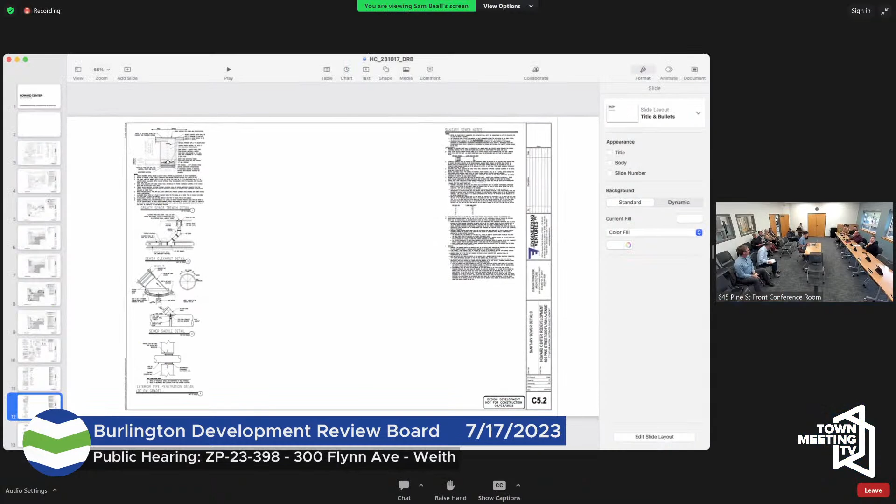So we have all of the drawings here. I'm going to share them by Zoom. Let's see if I can.

You saw everybody was here today to support the project we presented at sketch plan about a couple months ago. I don't know that, I believe Leo, you were here, but not Evan. Were you here? You were here. Okay, I did watch the original presentation.

Okay good, I just want to make sure I understand what you know and don't know, because we're going to focus on some of the staff report comments as well as some of the things we've heard at sketch plan and how we address them.

Before we get into that, I want to give Sandy a few moments just to introduce the project and talk to Kevin. We'll talk about landscape. I will talk about the architecture, and then we'll turn it over to you guys for questions. Sounds good. Great, thanks, Sam.

Good evening, everyone. I'm Sandy McGuire, and I serve as Howard Center's Chief Financial and Operations Officer. I'm excited to be here tonight talking about our redevelopment project. It's been a long time in the works.

We began searching for a solution to our increasing facility needs more than 5 years ago. And the project before you, demolishing the existing 24,000 square foot building and constructing a new 50,000 square foot building, will enable us to do a number of things.

It will enable us to co-locate services, providing efficiencies for those that we serve, and to increase the care coordination across our multidisciplinary teams. It will provide a contemporary workspace that supports technology, productivity, and collaboration, while also supporting the more fluid and flexible workplaces of our staff today.

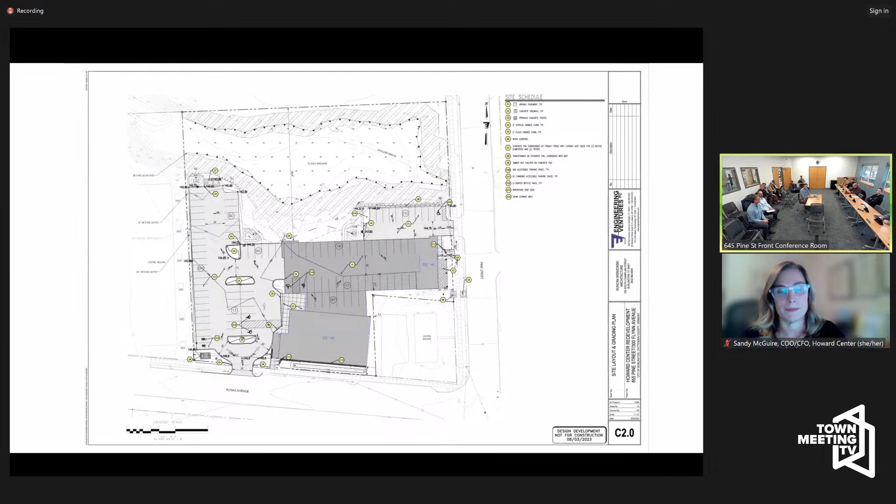Sure, briefly, it hasn't changed much since we met with you. It's schematic design, sketch design, and briefly, the parcel is on the corner of Flynn and Pine Street, right down the road here. The north half is the Englesby Ravine. It's well treed on the north and south side of the ravine. There's steep slopes down to the brook.

It's a wetland area with protective zones coming south towards the development. We met about a month or so ago with the Conservation Commission in this room and had a productive conversation, and Art Gilman, the wetland biologist who did the delineation, presented that it's almost park-like down in the ravine because of the overgrown canopy.

There's not a lot of invasives, there's not a lot of undergrowth, and it's just open. Probably the main thing to mention is preserving those trees and the shade of the ravine, and doing what we can to prevent invasives from spreading is the main goal there.

The south half of the site is the developed portion, and we're staying within areas that were pre-developed, whether building, paving, lawn, or accessory buildings. As you know from the summary, the building has grown by about 100%, double the size of the parking. That's achieved through efficiently laying out the site, putting parking under the building.

The main characteristic to mention is that while the existing site drains to the north into the wetland without any treatment, the entire site now will be collected, treated, and retained to the state and city standards before being released into the site.

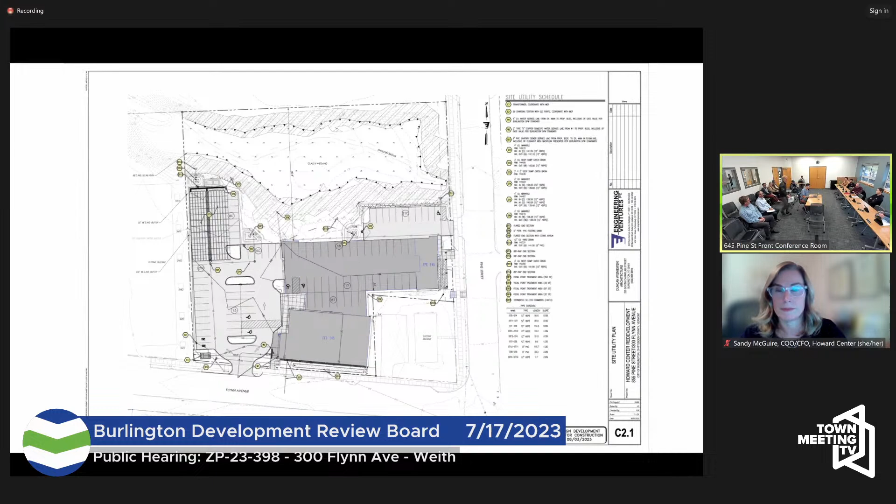At the Conservation Commission there was a discussion about native species on the site. We had a discussion about that, and I'll speak to that, and then we'll talk about the trees. As Kevin highlighted, the main entry to the site is coming in off Flynn Ave, and there's this building facade that parallels Flynn Ave.

There's a lot of ornamental plantings along there, and a rain garden for stormwater capture and treatment. So it's serving two purposes: one for the stormwater treatment, and also to address that frontage along Flynn Ave. There's a lot of landscape plant material along there that engages on the public side.

That's also the main entry - you come in off the sidewalk, the front door is right there coming in off Flynn Ave. That also coincides with the arrival sequence coming into the building, the signage, that sort of stuff. So that's really the primary focus of most of the landscaping.

There are shade trees in the parking lot where the islands are created to meet the shade requirements with large canopy shade plantings. As Kevin said, we're not really doing much on that northern portion of the site, just retaining as many trees as possible. Moving east on Pine Street, there's a secondary entrance and engagement along that streetscape.

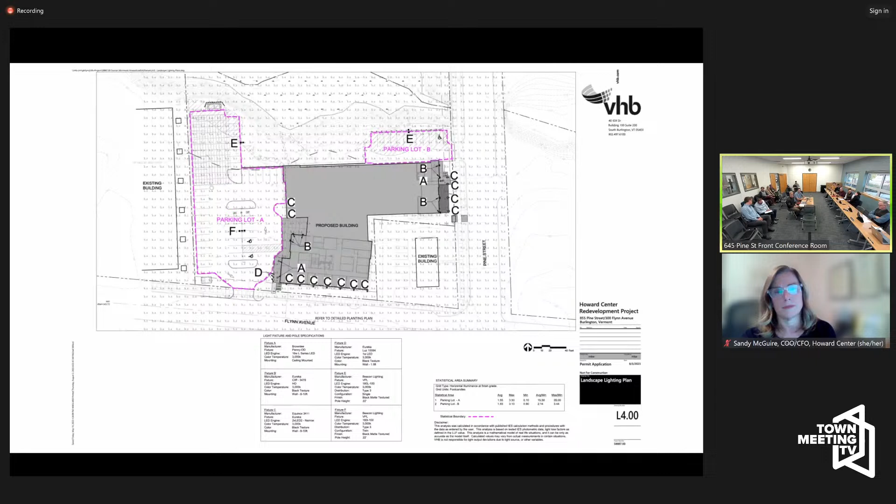What Sam just brought up, this is the site lighting plan, and we really tried to keep it very simple, recognizing that on the immediate west - I think it's 288 Flynn - that's a residential property, that existing building you see running north-south.

So the lighting, we try to keep core to the internal parking lot and maintain good illumination around the site circulation coming into the site. Then there's some building sconces and under-canopy lighting that highlight the building entry. The parking lot lighting uses the E and F fixtures.

There was one staff comment about the site lighting saying we weren't meeting the city standard for the max-to-min ratios. So using the city standards requirements about keeping lighting dropping off as you reach the property line, and also recognizing the existing residential building, it's really those 5 or 6 spots up in that northwest corner that are at a 0.1 valuation.

If we excluded those spots from the entire calculation, we would meet the max to min ratios. It was designed purposefully to keep the lighting low as we reach that parcel boundary, and those few spots right at the edge of the parking lot are the lowest, which are skewing that calculation. We could certainly meet that requirement, but the E fixture on the left, we'd have to increase the wattage of that fixture, putting more light on the site, which we don't feel is necessary.

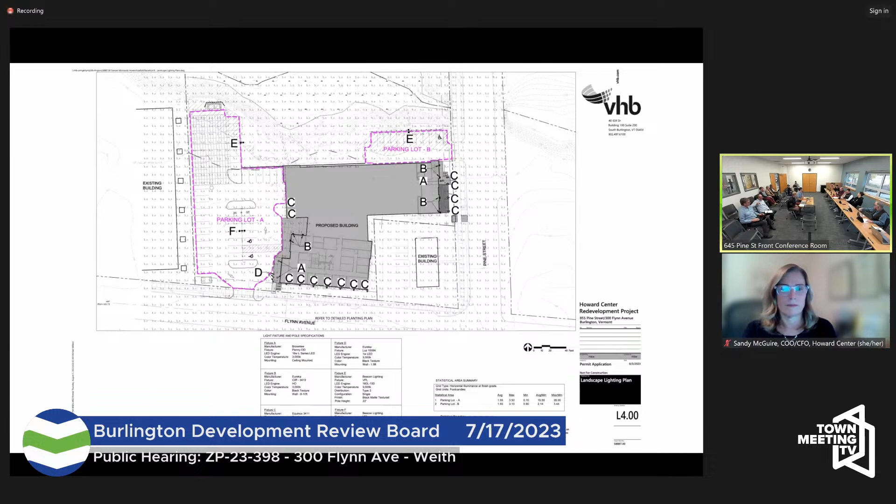So you would add more wattage, but keep the light more in the property? No, the opposite, we'd have to add.

The fixture heights are 22 feet. City allows 25. We're recognizing we're next to residential neighbors, and we feel 22 is that comfort zone of traditional parking lot lighting. So for that E fixture, for those 5 or 6 spots to meet the city standard, we have to increase the wattage of that one E fixture. So we have to go up in wattage to meet the requirement.

Sorry, lower the light? No, keep it the same way. As you're saying, it's due to the max/min ratio. Exactly, it's really an anomaly of 5 spots out of however many are calculated, literally right at the property line, just skewing the numbers. That maximum ratio reflects an evenness of lighting, so you're not walking through dark spots and odd spots. The lighting plan as designed reflects the intentional diminishment of lighting near a residential structure next door, which isn't really anticipated when we're reading standards for evenness of lighting.

Any other questions on that?

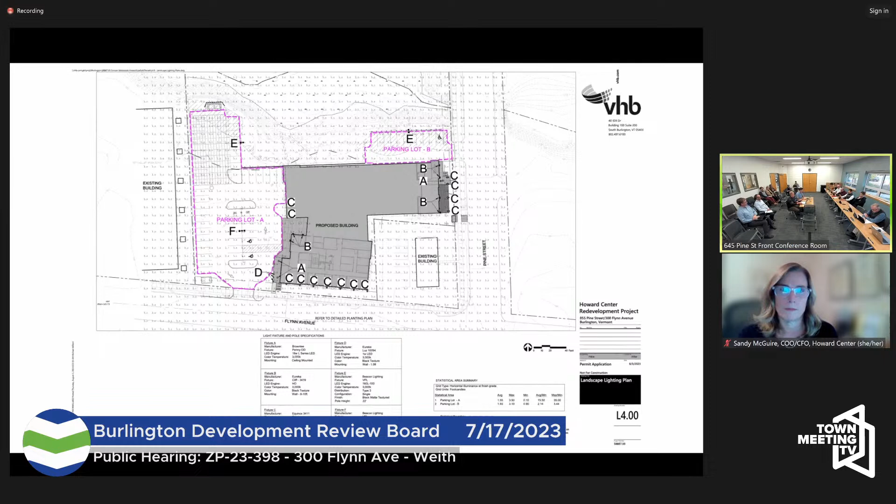Moving along to the architectural piece, when we were here at sketch, one comment from the board was concerns about the entrance and the prominence thereof. So we heard that and worked on the design to increase that prominence and make the entryway more inviting, while acknowledging that we need to open towards the parking area since people will be arriving by car.

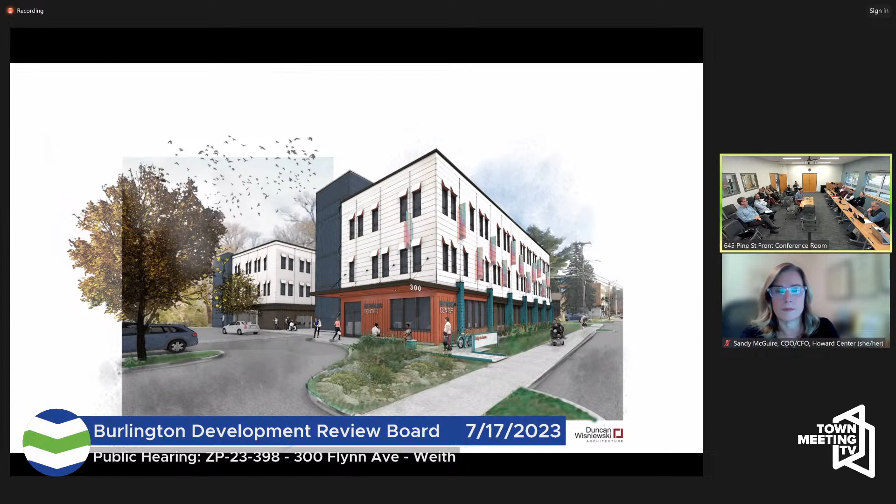Some of the changes: we brightened it up, we have terracotta colored siding at that entrance. It's looking a little washed out on the screen, but trust me, it will be brighter. We've got more signage, 300 underneath the awning, and a 'help is here' sign out front, plus landscape and a boardwalk style entryway to create that threshold condition, so as you walk through the rain garden landscape you feel like you're going somewhere rather than just crossing the sidewalk. Those were design moves we made intentionally to address those comments.

Here's another detail of that. You can see the boardwalk a little more clearly, as well as the 'help is here' sign, which helps to screen the bicycle parking.

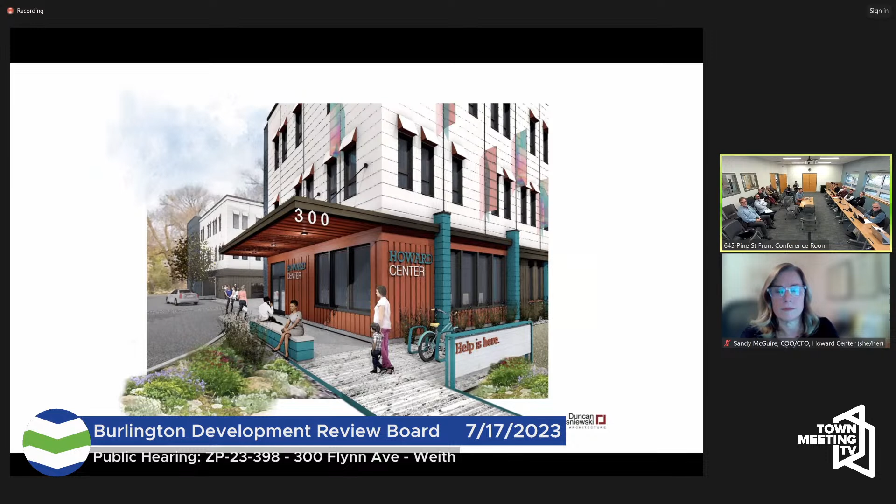The Flynn Avenue facade didn't change remarkably. We still have the dichroic flags—I use the term flags, but they're fixed grade elements of the facade. You can still see the entryway has changed slightly there, in this aerial perspective.

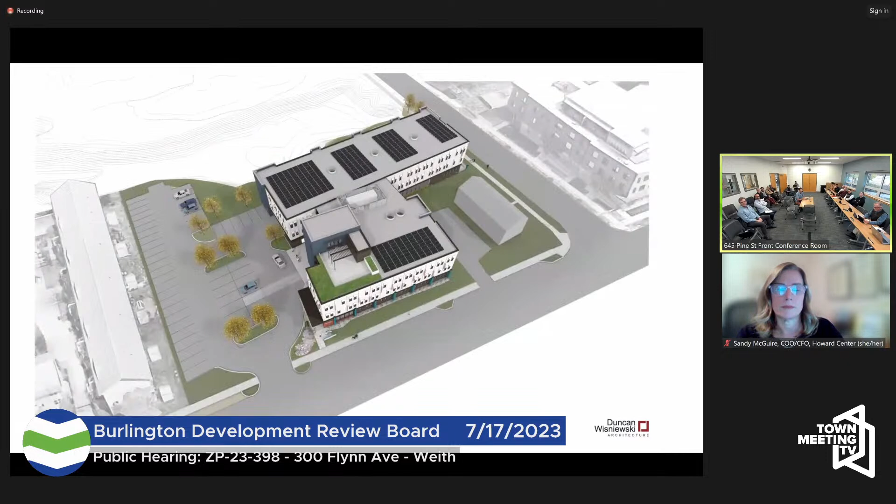Another question from the board was about this Pine Street elevation, which wasn't really rendered in a previous application, so this is updated. The brown siding there is a vertical metal siding that extends up and bifurcates the large format clapboard siding rendering as white, as well as the vertical blue metal siding around.

Howard Center referenced windows. We brought the same terracotta piers across here but lowered them to create a screened-in outdoor patio that opens onto the community room. Those larger doors, what I previously called garage doors, are overhead doors, but they're not accessing a garage—my apologies for the words I used previously—they'll be glazed, similar to Hula, where glazed overhead doors allow a nice relationship between indoor and outdoor space.

And that's the smaller Pine Street lot there. So when you were here last time, those garage doors we talked about—that's Howard Center space, right? Yes, that will be controlled by Howard Center but used for more community oriented events.

I can run through the architectural plans, but I think at this point I'd rather turn it over to you to see what questions you have from either the staff comments or the drawings we've submitted, and we can address those as needed.

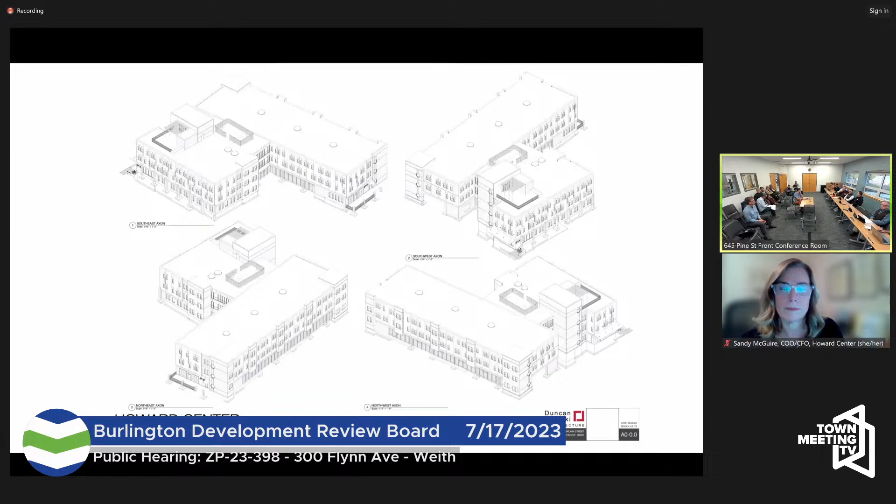And up and down the Pine Street corridor, despite my frustrations with it today, I apologize for being late. We've worked to increase pedestrian accessibility to Pine Street in general, and I appreciate the changes, or the added articulation of the Pine Street facade. I think that creates an entry, at least for residents or users who have access to the building.

Any other questions from the board? Anybody in the audience have a comment on the application? If there's anyone online who wants to speak, would you raise your hand? I have no one.

Well, not hearing anybody else, I guess we'll close the application. Actually, I just have one question.

I did see in the staff report that one of the proposed conditions is to revise the lighting plan so that it complies with the maximum ratio. As Mike described, he thinks what we have proposed is a better lighting plan for the project. So I guess I'm gonna ask.

Yeah, we're gonna deliberate. Okay, so I'll close the public hearing and we'll deliberate on this, assuming tonight.

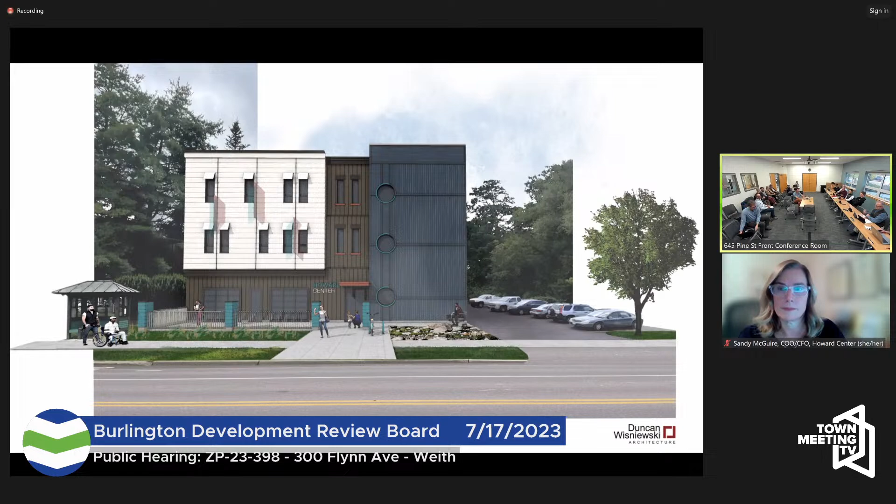ZAP-23-11, 457 South Willard Street. Appeal of notice of violation for fence removal.

Yeah, we get to go first. Yeah, we'll take it. Is there something you want me to open? Just a few photos. Good to see new faces on there. No, the board right here in the middle are probably not happy this evening, but that's fine, this is the first time we've met.

Okay, so this is an appeal of a notice of violation. In that situation, we ask that the city go first and articulate the basis for the NOV.

And please do a group swearing, just the first one. If there's anybody who wants to speak on this application, please raise your right hand and repeat after me: I swear that the testimony I'm about to give is true and correct under the pains and penalties of perjury. I do. Great, all right, thank you all for being here.

My name is Ted Miles. I'm the code compliance officer for the City of Burlington. The property in question here is 457 South Willard Street. The complaint is about a relocated fence and a retaining wall. This is a citizen complaint that came to our office in April of this past year.

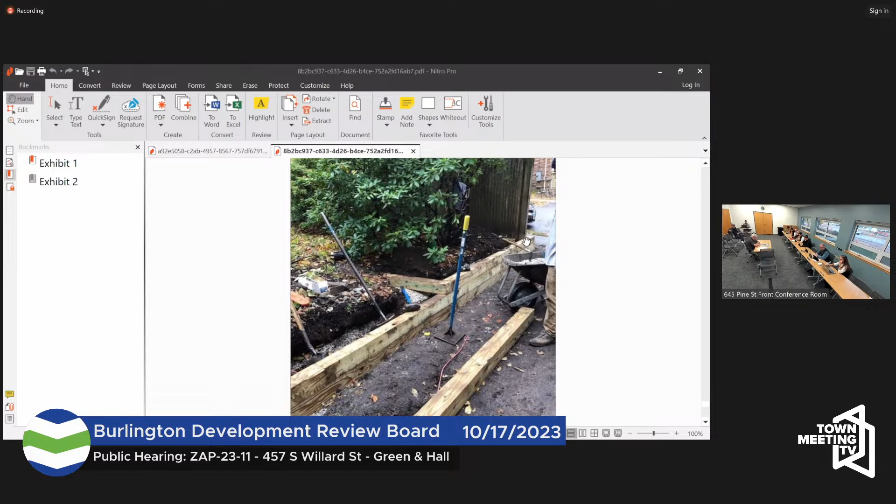And it seems like the bottom of that fence in this photo, the old fence, is very close to the height of the new retaining wall. You know what I'm saying? Yeah. Seems like the retaining wall was actually dug in.

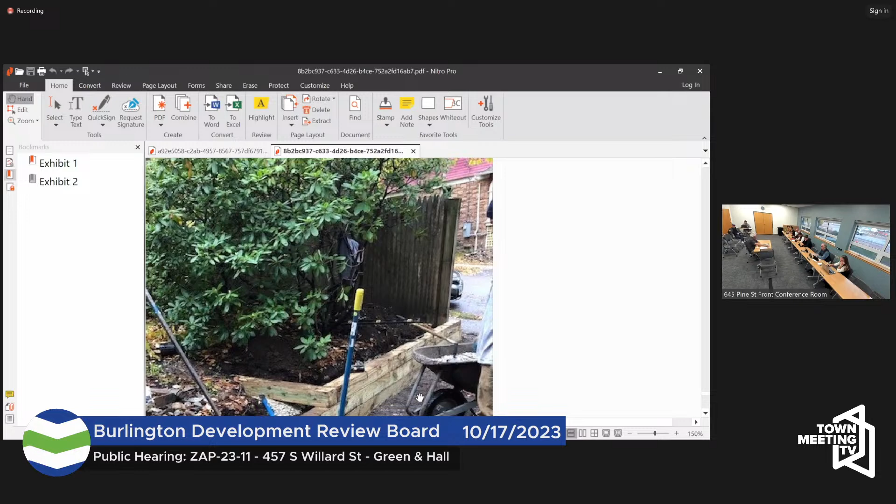You're not, you didn't take this photo, you're not positive exactly what it should be. Trying to figure out if our 6 feet is measured in the same place as the current height.

Use that to measure. Well, I measure from ground level. Okay. The ordinance has it measured from curb level, so on these properties that actually have a bit of an incline, if you measured from curb level, some of them would not be at that fence height at all.

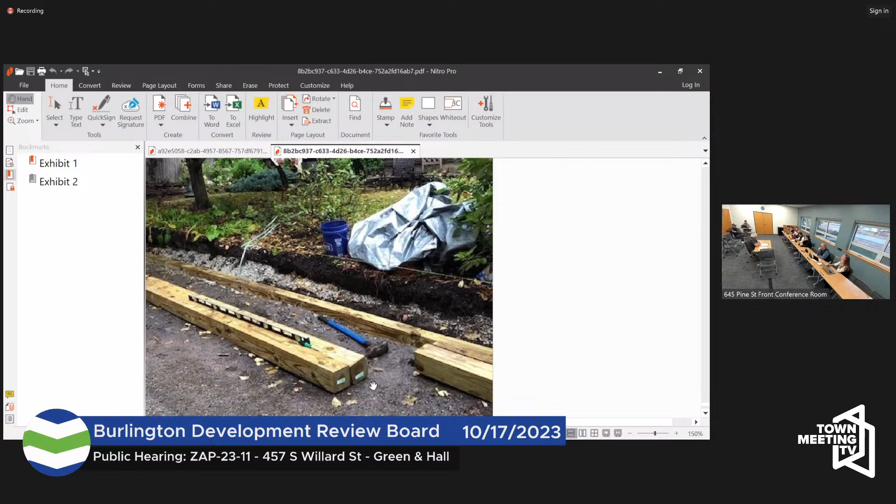But that, especially in fence, some of this section - do we know what the actual height of the constructed, existing, grandfathered non-conforming fence actually was? The fence was 6 feet, which is what they're permitted to have.

Right, I understand that's what they were permitted to have. I'm trying to understand, do we know the actual... It's grandfathered, so whatever it was is what they're allowed to rebuild. Yes. Do we know what the actual height of that edge of the fence was?

I can only assume it was actually 6 feet in height, because in this one here, the newer photos, you can see where actually a section of the fence that looks like it was sitting on top of the retaining wall was actually cut off - looks like the bottom of the fence was cut off to sit on top of the wall.

In this one that I have, in the section where it's actually the fence, you see that part of the fence at the bottom was cut off to fit onto the retaining wall, which is why we have an odd 7'3" fence. Okay, that's all I have.

Any other questions for Ted? The applicant or landowner opportunity.

Mark, how are you? Good. Introduce yourselves, and yours - homeowner, perpetrator of the fence.

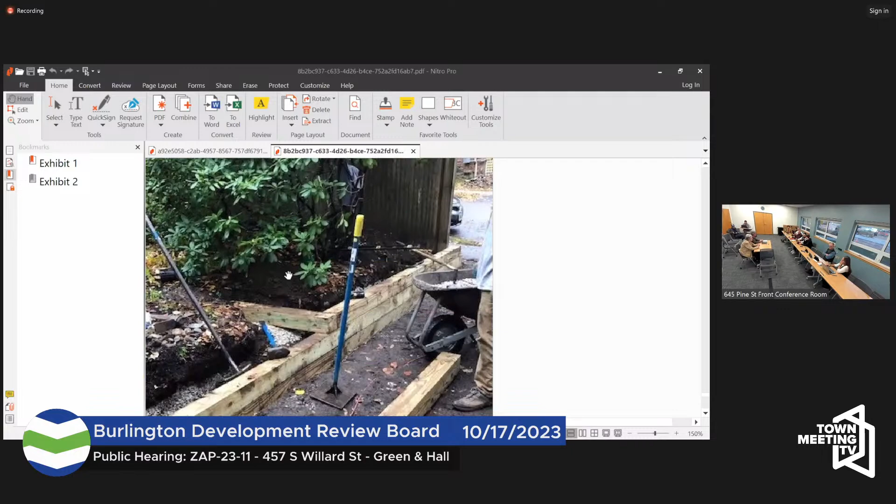It was not optional, believe it. It's a longer fence than it was. Well, yeah, usually they twist a little bit to go down. Yeah, it was bad. And the purpose of it really is to support the fence.

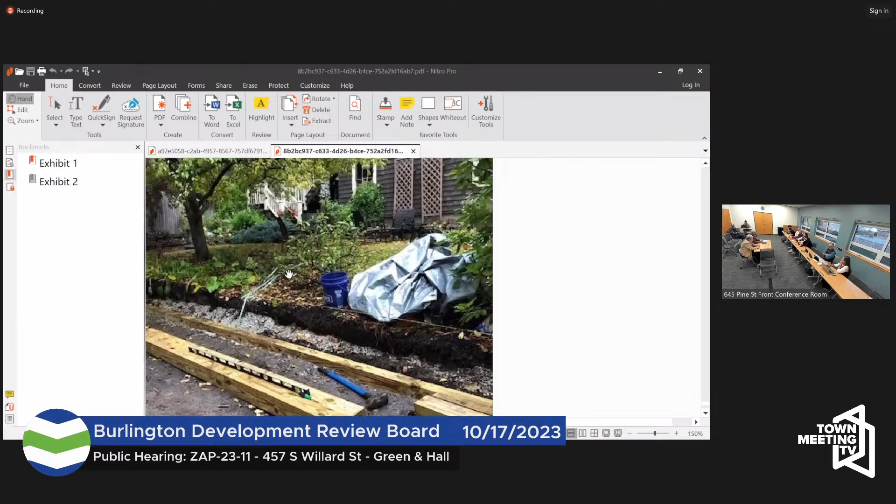That fence has been essentially the same configuration, essentially the same spot, plus or minus. You can see from the planning, those rhododendrons are fabulous in there. You could plant rhododendrons, they can easily grow up to 7 or 8 feet, impacting the clear sight triangle.

Yeah, so we could put anything, it's vegetation, and it's not something that this provision covers. I've had another fence case like this, the see-through fence - we couldn't put the see-through fence up, but we could put shrubberies all along. So once in a while I just go, what? I have another question about this, just to be, maybe perhaps in the thinking.

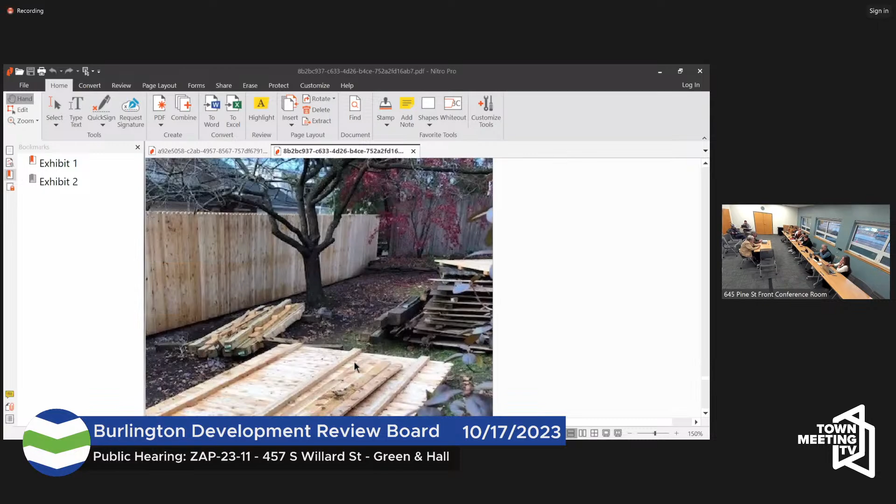Any more questions from the board? I have one more question. First, on one of the photos where it shows the retaining wall being built in the section of the old fence still there, can you tell me if the corner post that's in the corner was replaced or if that was original? I bet it was, but I don't know.

That would tell a lot, because if that post is still there, it's the same. I'd be surprised if we left an old post because they were really rotted. If it's a pressure treated post, it might still be okay. Yeah, certainly replaced it, that's true. Would it be the same height as the new fence or what? The difference would be nominal, it's just 6 foot fences.